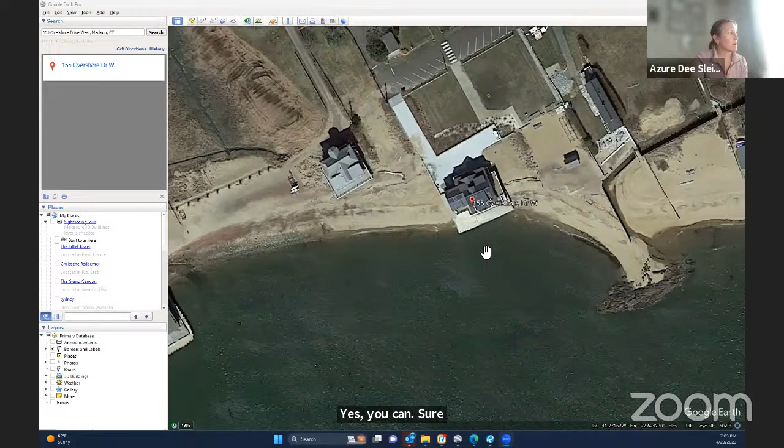So we were here before you guys probably about a year ago to do seawall repairs, and the first 25 feet of this knee wall, which is basically like a large curb that separates the beach from the driveway in the area. If I can share my screen, yes you can. So now we have the aerial photo of the site, and this is a great one actually because it shows the problem. So the seawall was repaired last year, and this knee wall we're calling is this wall that separates the beach from the driveway, and 25 feet was constructed last year, over the summer, along with the seawall repairs.

And the storm activity from this winter demonstrated that the 25 feet simply wasn't long enough. This photo is great because it shows all the sand that washes up into the driveway on a very frequent basis with these storms. So the owner would like to simply extend that 2-foot high wall that separates the driveway from the beach area, another 46 feet approximately down the length of the driveway here. Not the entire driveway, just another 46 feet. So very simple, a 2-foot high, 46-foot long wall just along the edge of the driveway there.

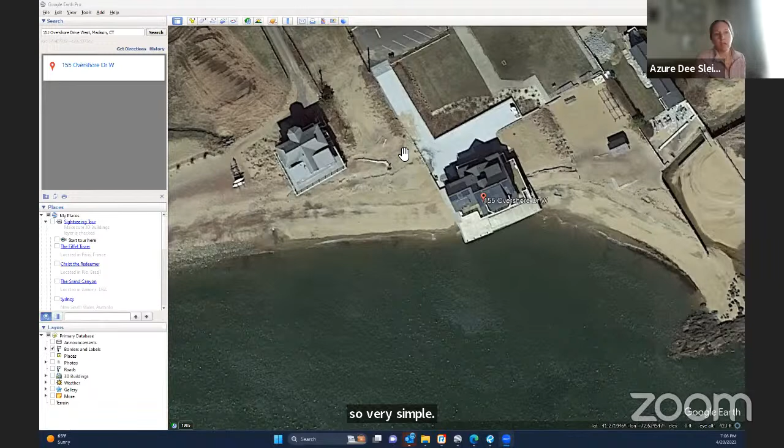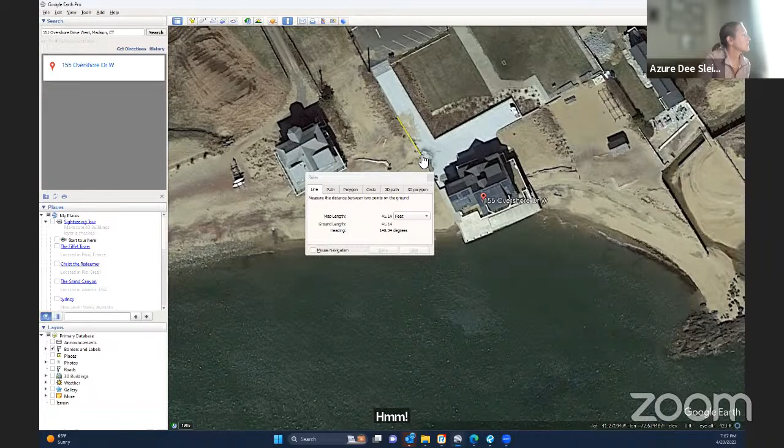What's the full length of the driveway? Oh geez, that's a good question, let's see. It's about 113. And we're seeking, I believe, from about that length. Okay, yeah, just actually, and again, you can see just that sand there. Hopefully it comes through on the video. Yeah, there, it did.

And is that a gravel driveway? It is a paver, stone paver. Stone pavers. And also, where's the property line? Is that the property line? It is essentially the property line as well. Right, okay.

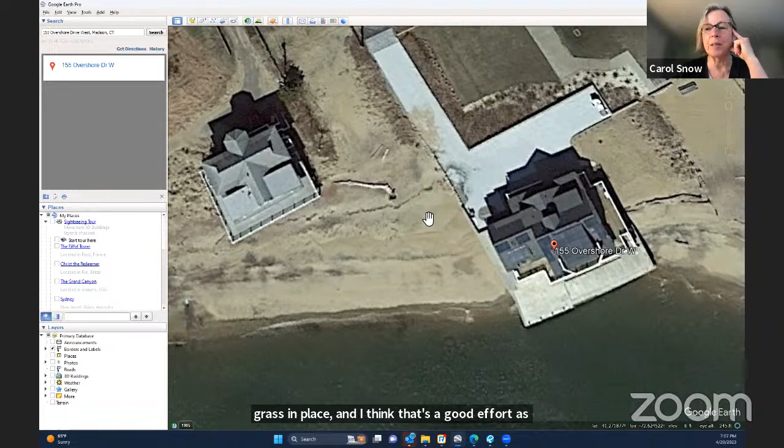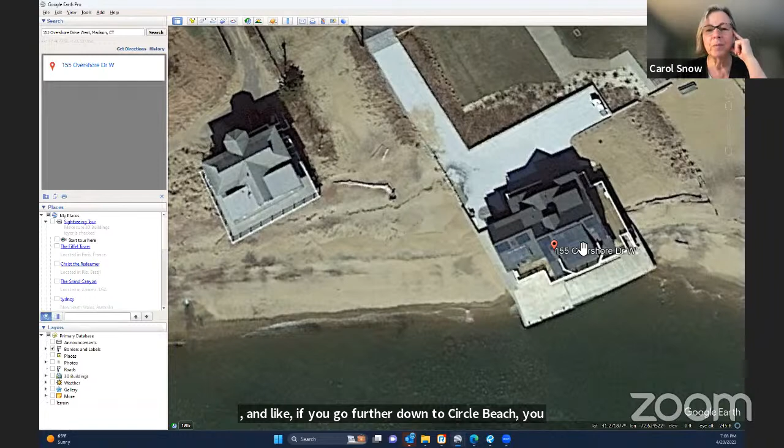I was just wondering, I think the last time you were before us, we had made sure that you planted grass or kept the seagrass in place, and I think that's a good effort as well to try to control some of that. I know we did have really bad storms this winter though, and if you go further down to Circle Beach, you would have seen sand dunes in the road. Yeah, as you're aware, the applicant suffered severe damage too over on the dune area that covers a septic system on the other side of the property again during these storms. So yeah, it was a pretty severe winter in this area.

We went out and took a photo of the grasses, and that was one of, as Carol mentioned, the concerns - flagging them and demarking the area so that they weren't disturbed during the rest of the seawall project. I know this isn't really adjacent to the expansion, but when we referred this to DEEP, that was one of their suggestions, to keep those conditions in place this round as well, to allow those grasses to regrow. The photos I have show even more coverage than this aerial.

I don't know what the date of this one is, but they're looking like they're coming back a little bit, which is good.

Okay. The last thing we'd point out is that we did receive a copy of the NOV for the COP that was issued for the seawall construction.

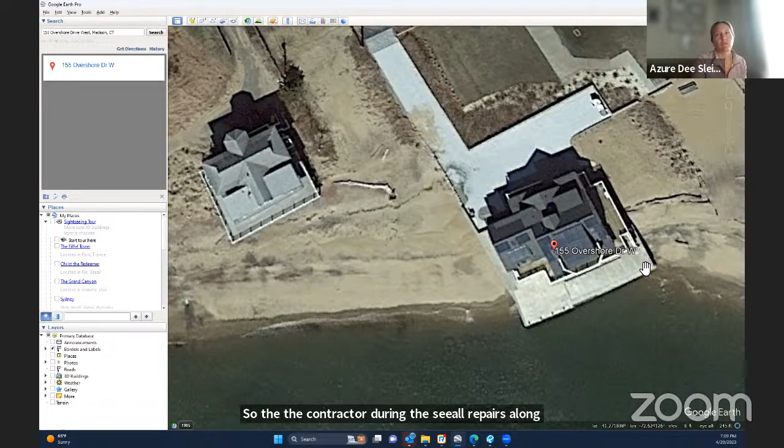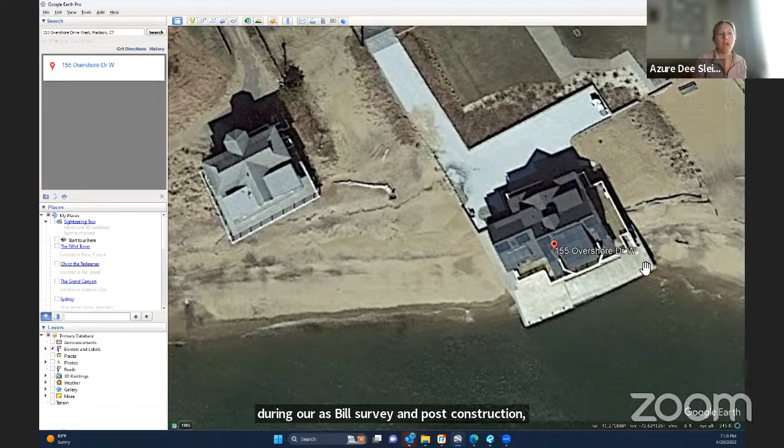Yes, a new application has been filed. During the seawall repairs along the edge of the house, the patio there, the contractor was a little overzealous. The DEEP conditions for the oversheeting of the seawall repair were to be within 18 inches, and there were areas where, for numerous constructability reasons, he exceeded 18 inches without notifying DEEP in advance. During our as-built survey and post-construction certification, we brought that to DEEP's attention, and they were willing to work with the owner to resolve it in a way that obviously wasn't going to make him rip it out at this point, because that would be extremely detrimental to the property and the environment. It's sheet pile backfilled with concrete.

But to uphold the integrity of the COP process, which has limits on what's eligible under a COP versus a structures dredging and fill permit, they made the applicant submit a structures dredging and fill application to bring into compliance the nonconformity and the over-extension of the 18 inches, with a 4 times the fee penalty - so a financial penalty on top of that. That application has been submitted and it's pending review with DEEP.

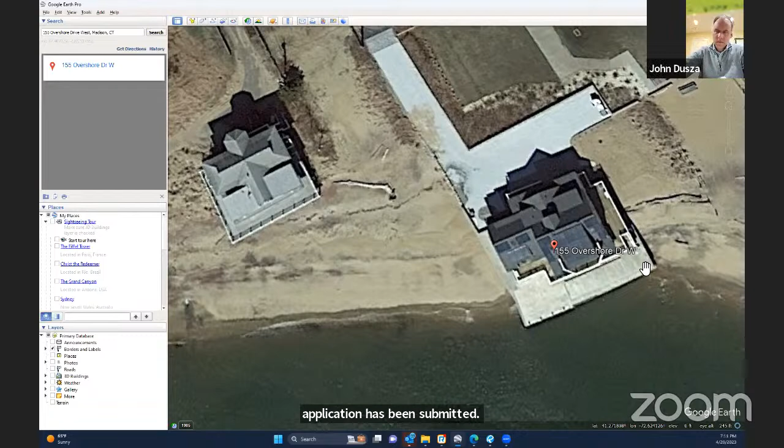Thanks. No problem. I had two other questions. The first was regarding the inability to achieve the requirements in the first one regarding the seagrass - is there a similar risk with this extension of the wall?

No, and the area where the digression occurred was not where seagrasses are located. It was driving sheet piles around the outer edge of the patio in the beach area, and there were some issues with keeping sheet piles in alignment and obstructions once they got subsurface. Those types of issues won't be encountered up here, since they're just forming concrete in place in the dry, with handheld equipment and so forth. So this area is much easier to construct.

Has there been any kind of assessment, or is it required, on the impact to the neighbor? Because it looks like the sand's now going to pile on the neighbor's side instead of moving freely. Are they aware of that? Is an assessment needed? I'm new, so I ask silly questions, but if I lived there I'd want to know what's going on to make sure it doesn't impact me negatively. So has that been done, or is it required?

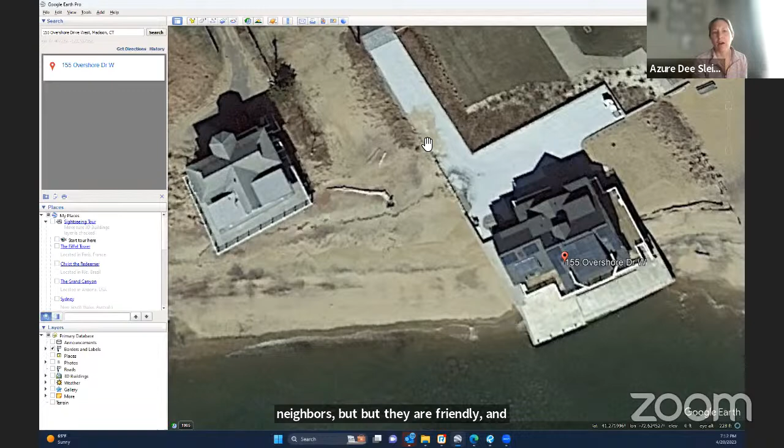There's been no assessment. The neighbors are aware - they were notified as part of this application process. The two neighbors are amicable, which is a good thing; not often do we have that with waterfront neighbors, but they are friendly. So he is aware, but I don't foresee any adverse impacts. The sand will remain - if it doesn't go into the driveway, it'll remain in this beachy, sandy wetland area, where hopefully it should stay.

It looks like it is the neighbor's sand, actually, if you wanted - well, technically, yes, we can keep it on there. The property line essentially is right up the edge of the driveway. That's why I asked. And that property can keep the sand where it wants to be and not in the driveway, which makes it extremely difficult with the pavers to get it back out of the driveway.

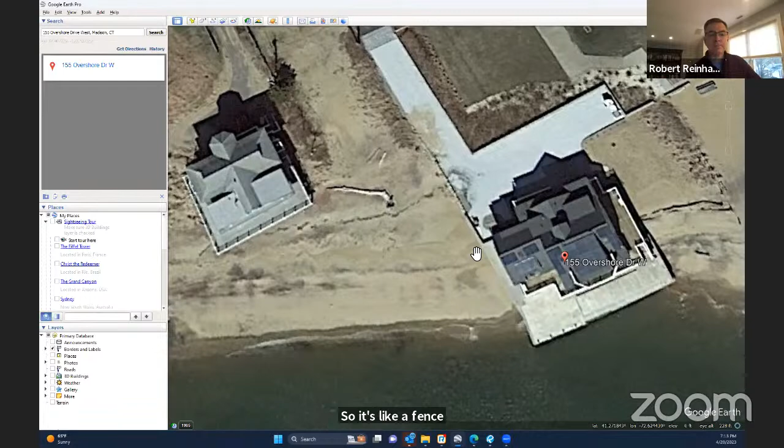Yeah, and the house to the left is the owner of that property up to the driveway. I believe that's correct. There's no zoning requirement for a setback for a stone wall or wall of this size, or notification of abutters for that. It's like a fence at this scale. If it were a larger retaining wall, there would be other requirements, but not in this case.

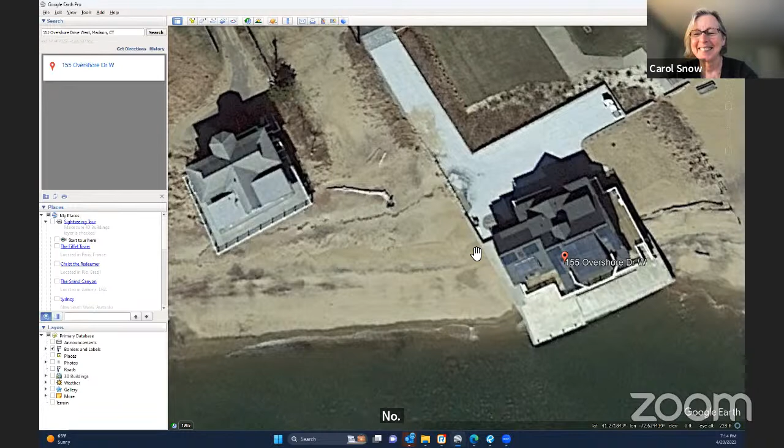Any other questions? Are we ready to make a motion? If there's no further discussion or questions, especially for Azure? Not for me, I think the more grass you plant, the better. Sure, and we're happy to have you include any of those conditions in the permit.

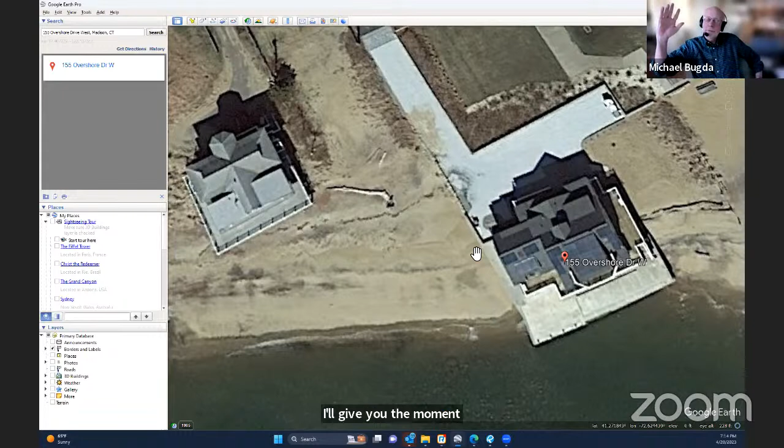Thanks, so we have staff notes and recommendation. If I could have a motion to approve. I'll give you the motion. Can you share those if you want, put them up on the screen. I just have to swap. Yes, I will.

So John, I think you made the motion to approve. I did, Michael Bugda did, sorry, thank you. John, did you second? I saw a couple. Yeah, I guess I did, I was a little slow. That's okay. Any further discussion?

Did everyone have a chance to read over the staff recommendation, staff notes? I did, yes. These are essentially the same conditions as the first approval. The only additional is number 2, which was a recommendation from DEEP, that if erosion control soil and sedimentation controls are necessary, those be installed.

So would someone like to go ahead and read it for us? It's just this section here. I can do it, do we have to read the whole thing or just the draft? Oh just here, I was giving you some background on the previous application, but Azure already did that, so I don't think we need to read through the entire staff report, this is just the motion here.

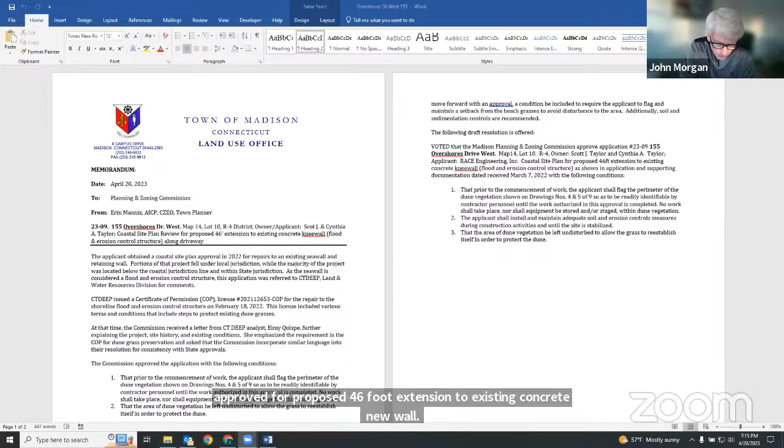Voted that the Madison Planning and Zoning Commission approve application number 23-09, 155 Overshores Drive West, map 14, lot 10, R-4, owner Scott J. Taylor and Cynthia A. Taylor. Applicant Race Engineering, Inc. Coastal site plan approved for proposed 46-foot extension to existing concrete knee wall, flood and erosion control structure as shown in application and supporting documentation dated received March 7th, 2022, with the following conditions.

That prior to the commencement of work, the applicant shall flag -- that should say March 23. I'm sorry, that's an error. I was gonna ask that. Okay, I apologize, 2023, there you go.

March 7th, 2023, with the following conditions: that prior to the commencement of work, the applicant shall flag the perimeter of the dune vegetation shown on drawings numbers 4 and 5 of 9, so as to be readily identifiable by contractor personnel until the work authorized in this approval is completed. No work shall take place, nor shall equipment be stored in or staged within dune vegetation. The applicant shall install and maintain adequate soil and erosion control measures during construction activities and until the site is stabilized. And number 3, that the area of dune vegetation be left undisturbed to allow the grass to reestablish itself in order to protect the dune.

Thank you, John. I think we can go ahead and vote unless there's further discussion. All in favor? Aye. All right, looks unanimous. Thank you everyone, thanks Azure, thank you, have a great night.

All right, next item is 23-14, 131 Cottage Road, map 31, lot 25, T-zone. This is Cottage Road Development Partners LLC. Applicant is the Caleb Foundation, and it's a site plan review modification to add dumpster locations, amend parking and the community center building. So do we have, I see Michael Harkin coming on board.

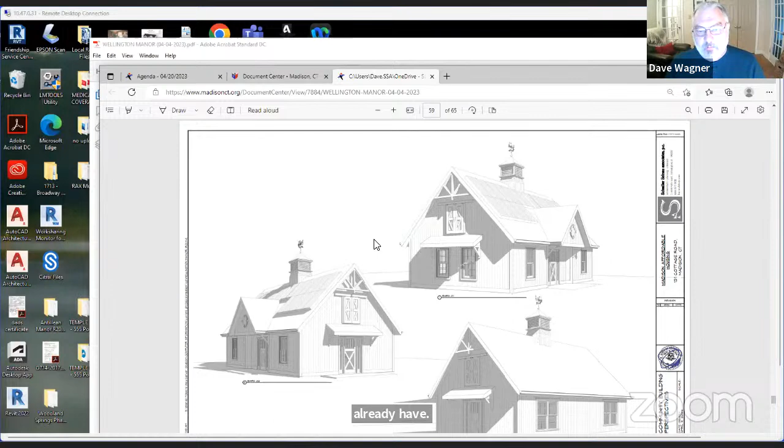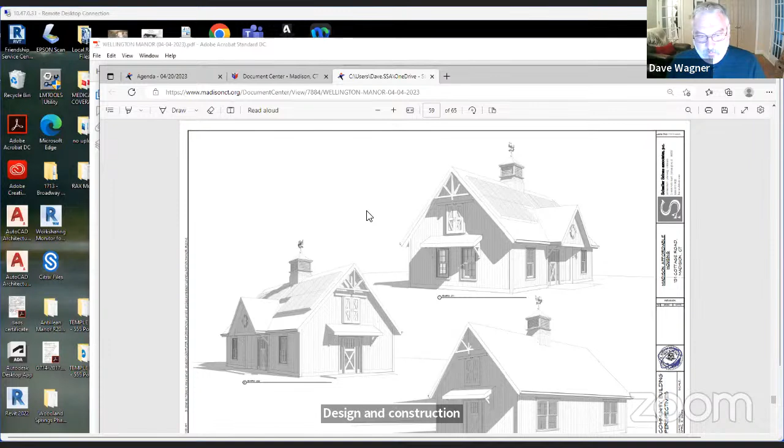This is part of the application package that you guys already have. This is our proposed community building. As part of the funding and the tax credit money received, which is a competitive round of funding, we have to comply with the CHFA design and construction regulations and the DOH design and construction requirements for this project. So it included a community building, which we think is a great thing for this community.

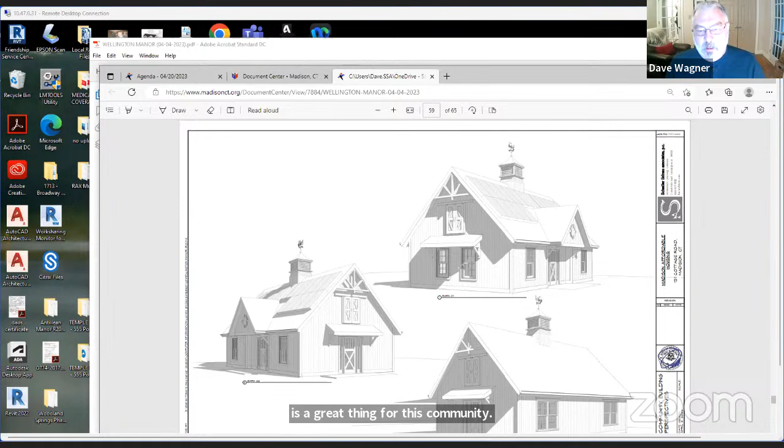We tried to make the community building a similar barn-type structure to what was proposed for the recycle building. If you scroll, those are the elevations of the building we're proposing. If I scroll down here, I can show you what the community building is about.

One of the requirements through our funding application and our energy sustainability requirement is that we are actually LEED Platinum certifying this project. As part of that, we have to have solar panels that power common areas, and I believe they have to power 100% of the common area requirements during certain times. So we're showing the solar panels because it was all part of the LIHTC, or low income housing tax credit, money.

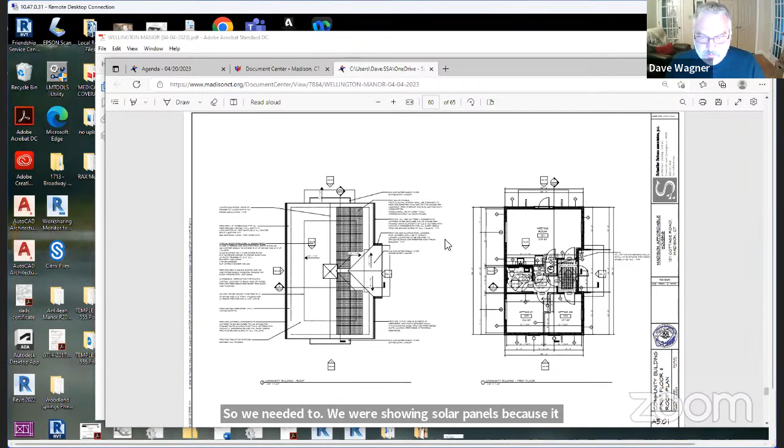If I can zoom in here a little bit, I can give you a plan of the community building. It's a simple structure with two office spaces for administrative services, a vestibule, a public handicap accessible toilet, and a meeting room where we can bring residents in if we need to for communication between administrative staff and residents. They're also able to use this room as a community meeting space if they just want to get together and play cards or do any kind of community activities.

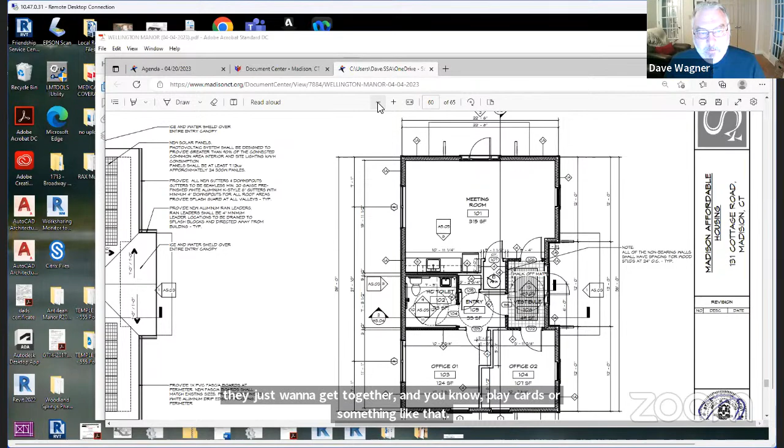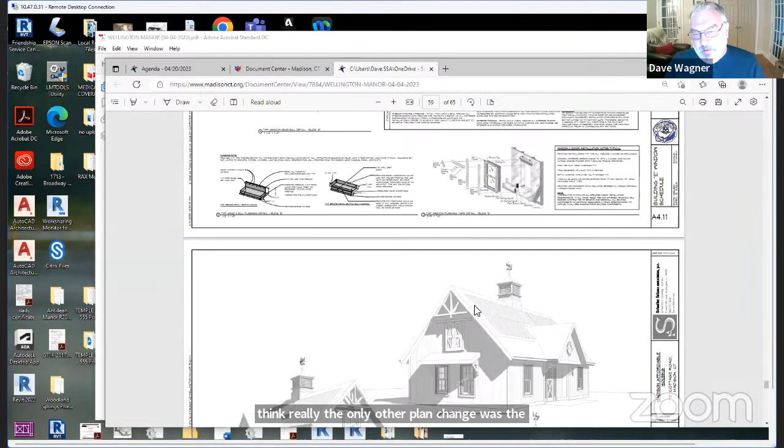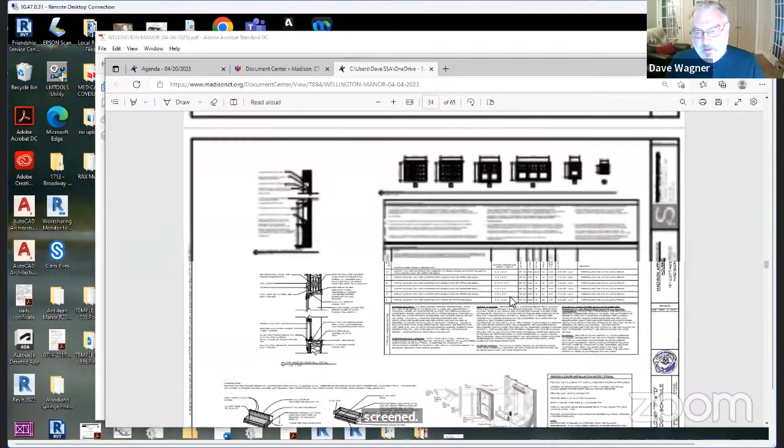As Michael stated, I think really the only other plan change was the addition of dumpsters rather than having a recycle building. If I can scroll up here—way up, sorry—we provided some dumpster enclosures that are fully screened. I know there was concern from the neighboring property; they didn't want to see dumpsters around there, so we have complete dumpster enclosures. This may not be the easiest way to scroll up to this, I apologize.

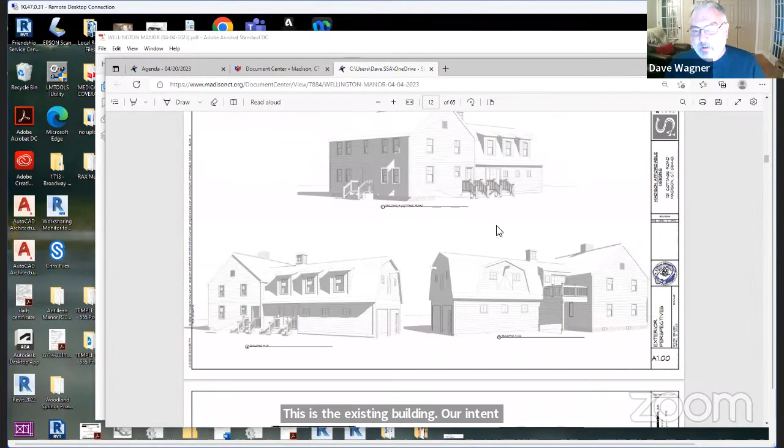Landscaping hasn't changed from what was originally approved. This is the existing building. Our intent is to make this building and the community building look similar.

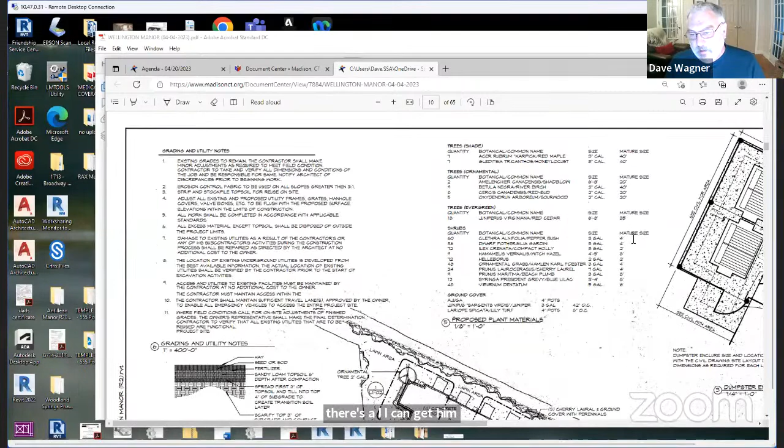Here are the dumpster enclosures we're proposing, where they're completely blocked off from all sides. They're openable for garbage pickup on the front side that Michael showed here, and on the side of the buildings—if I can get in there—the side of the dumpster enclosure, there's an access point here where residents can go in and out and bring their garbage. The intent is to have the enclosure closed except for garbage pickup.

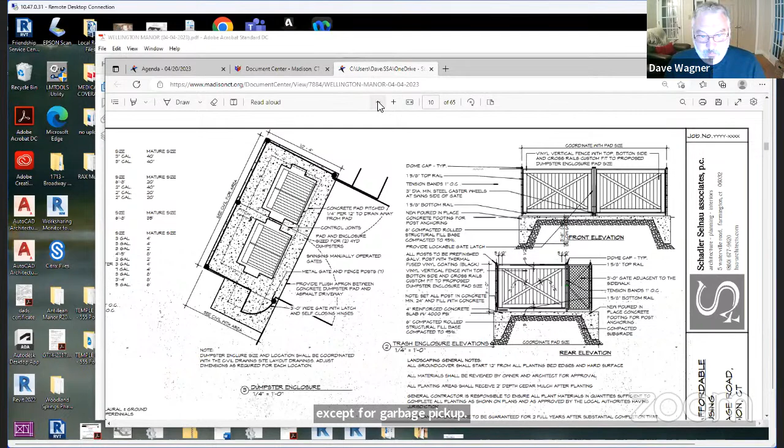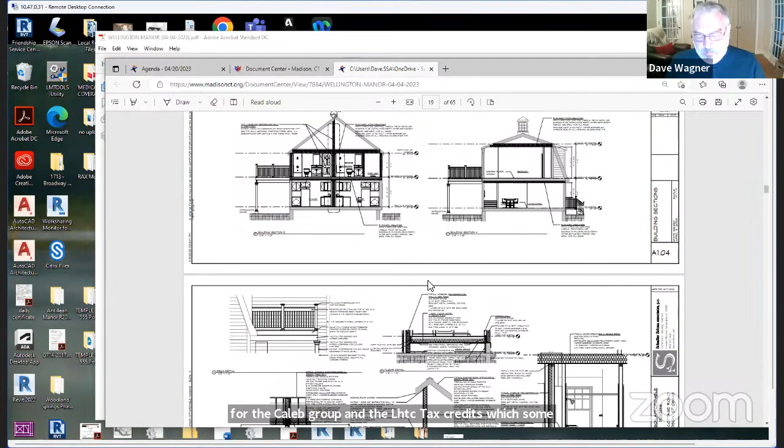And I believe that's it. We really didn't make a lot of changes to the exterior of any of the buildings from the existing approval, because we were locked into the foundation footprints. The only thing that changed is the program requirements for the Caleb Group and the LIHTC tax credits, which changed some of the apartments. The number of bedrooms, I believe, was changed a little bit. But as far as the overall design concept, it's the same as it was when it was approved a few years ago.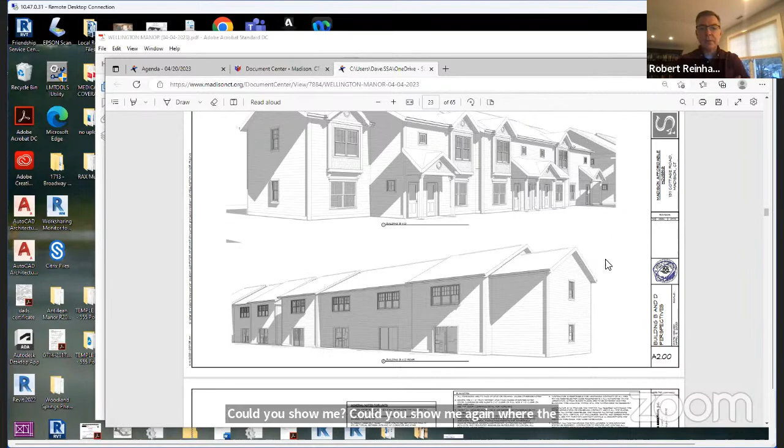Could you show me again where the dumpsters in the back part of the property would be located along the fence? Okay, I don't remember exactly. It was next to the first building and the second building, in between the first and the second.

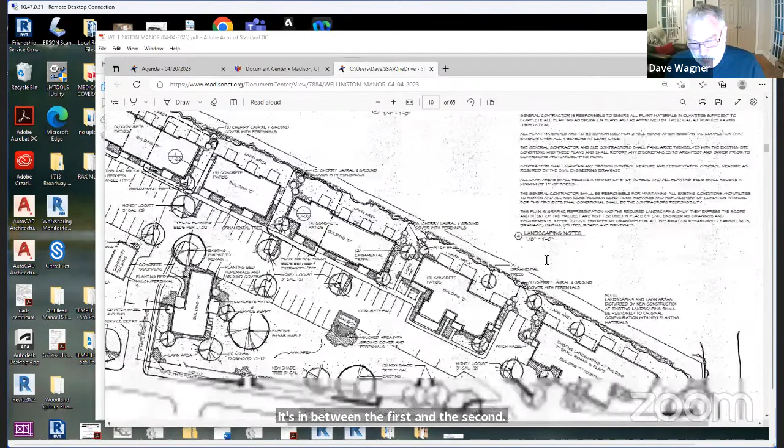Yeah, so if I can zoom in here for you, hang on one second. Oh, this is not the updated one. I apologize for that. If you guys want, I can show my site plan. Michael, if you could share. Yep, stop sharing, and I'll go to share screen.

Can everybody see that? Okay, I see it. So the first dumpster location is where my cursor is. This is the existing building that we had constructed about 6-7 years ago, so this is fully occupied. There's the first one with the full enclosure, and then our second one is directly adjacent to the community center, again with the full enclosure.

Okay, thank you. Did you have to add any lighting, or was the existing infrastructure already sufficient? Yeah, everything was sufficient. Those were the only real changes we had to make, and again it was just to tweak things in order to make both the architectural plans and the engineering plans similar, so everybody's on the same page as far as when it gets constructed.

Okay, and for the solar panels on the community center, are you storing any of the energy, or are you only using it actively as it's generated? At this point, I believe it's an active system. We don't have any provision right now for storage. However, the Caleb Group and their consultant is working with a solar company, so that may be an option. I'm not sure exactly where they are at this point. All right, so you're just synchronizing with the electrical infrastructure of the area, and you're not doing any net metering, I assume then? No, okay.

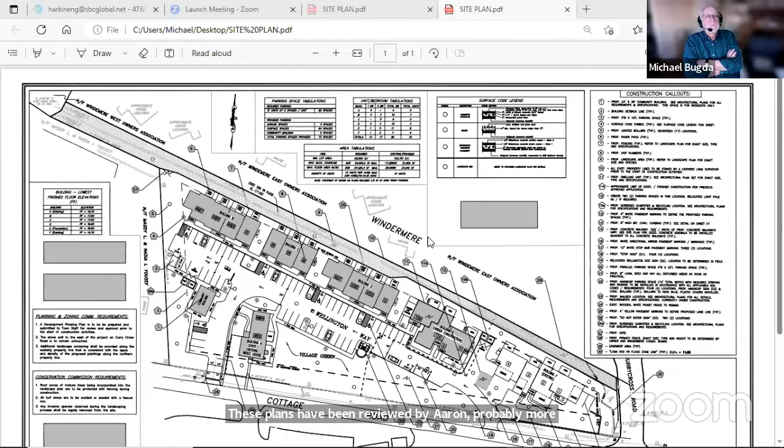All right, guys, just to make a note that it's not like we just made these revisions and didn't review them. These plans have been reviewed by Erin probably more times than she would want to have to review them. But since they've been revised, I met with her twice just to make sure we were covering all the bases and everything ran concurrently between the architectural plans and the site plans. So both are matching up and both are ready to go and start construction again.

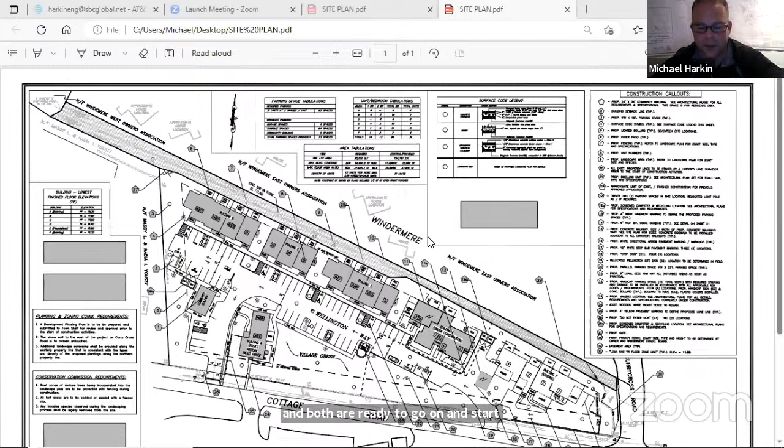So with that being said, I think that ends our presentation. And again, if anybody has any questions, I think as a group we'd be happy to answer them for you.

I can follow up also, as Carla indicated in her introduction, she's been actively meeting with committees here over the last week. The group presented to ACA all the facade revisions and materials, talked about color, and received a unanimous vote in favor of the modifications. The second meeting Carla had was with our newly formed Affordable Housing Committee, to discuss the process of nonprofit affordable housing developments and some of the challenges and success stories. We're very thankful for Carla's time for that. The group was really appreciative. This is, I believe, our first nonprofit affordable housing development in town.

Did anybody, I know most of the committee or the commission was not here for the original approvals, have any questions specifically about what the development is, so that you're not blindly just looking at buildings here, that you understand what this development is?

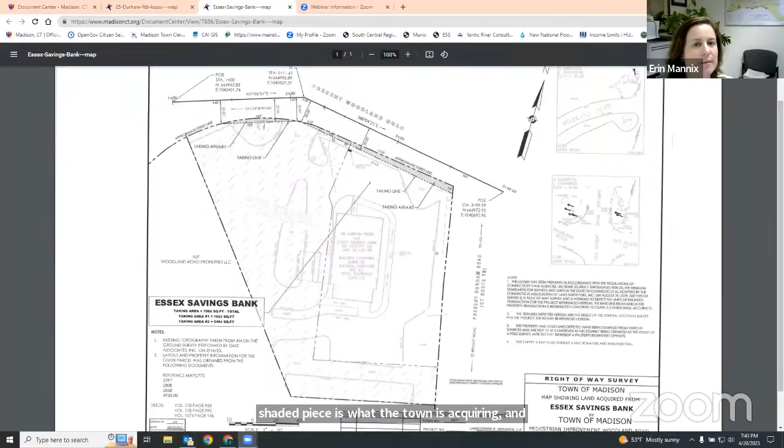So in doing this, the applicant needed to apply to the Zoning Board of Appeals for a variance for increasing the nonconformity of their lot area. But the Zoning Board of Appeals did grant that variance, and so they were successful. And now we're looking to actually make the transfer of land. So all the legal documents are in place for the sidewalk.

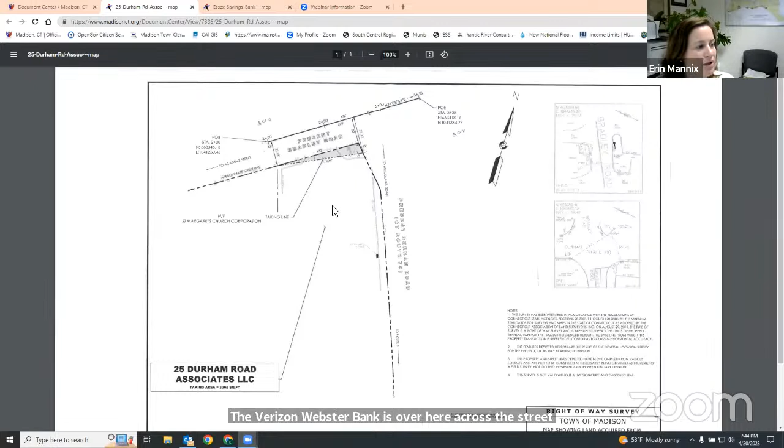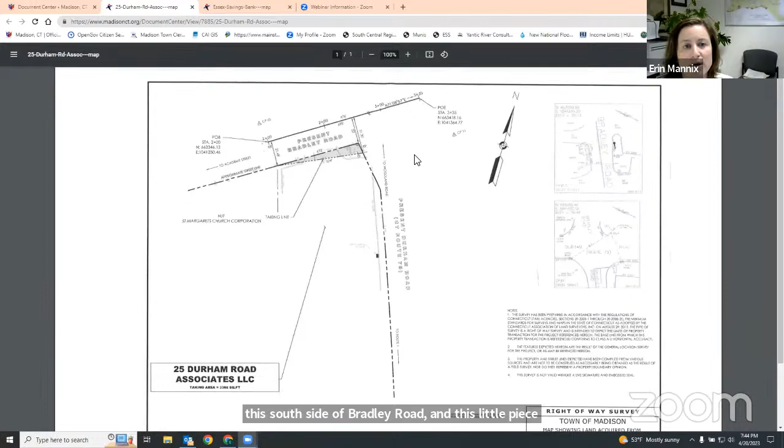The second property was a little simpler, and this is again on the southwest corner of Bradley Road and Durham Road. The Verizon and Webster Bank is over here across the street. This is a dentist office, which is right next door to St. Margaret's Church. Okay, yeah, I know where that is. This little triangle is the other piece that the town, the sidewalk is coming on this south side of Bradley Road. And this little piece is what's being transferred to the town to widen the right-of-way there. So the entire project will then occur within town and state right-of-way, because Route 79 is, of course, a state road. So that's really the scope of the project.

And the commission, you can see that the acquisition of this land helps create our sidewalks, and in our plan of conservation and development, our downtown area is clearly identified as an area where we would want to increase pedestrian accessibility, especially in our transit-oriented district. And having a development such as Concord Meadows and being able to link that area to our senior center and our transit and our downtown shopping is really a great thing. And so these residents won't have to be walking on that shoulder of 79 moving forward. Any questions on the project?

The entire project, just for reference, is going to cost between $700,000 and $800,000, and we've secured grant funding successfully, so that it will cost the town about $100,000. That does include acquisition and construction costs - that's the entire cost of the project. Okay, yes.

Aside from legal fees, are there purchasing fees? I don't believe there are purchasing fees. This is something that the property owners are giving to the town.